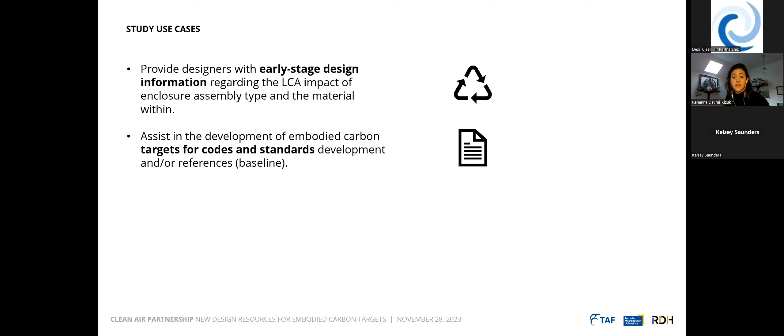Our next two points are for manufacturers. Our first bullet allows manufacturers to develop an understanding of the context of their projects or products - where their products fit within assemblies, which assemblies they're used in, and how the embodied carbon emissions of their products contribute to that whole assembly amount. Hopefully understanding where their product fits in the global context, they can use that as a way to innovate.

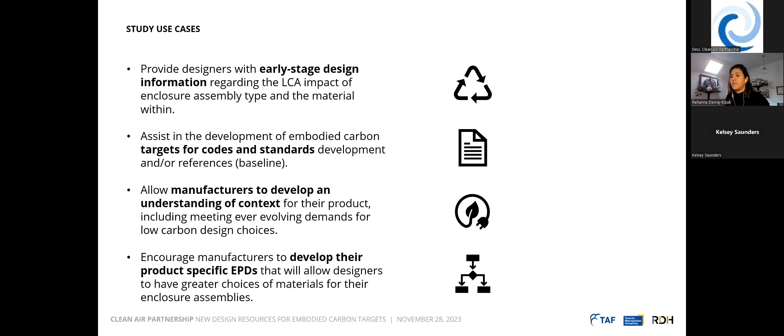And develop more options. Secondly, we want to encourage EPD generation. Availability of EPDs is a large limitation when conducting life cycle analyses. We think this tool will allow designers to focus their attention on materials that have lower embodied carbon potential, and have the highest environmental impact with their projects and seek out alternatives. The request for these alternatives can then incentivize manufacturers to develop EPDs for their own products and move the industry forward.

I'll jump into our methodology now. Something we like to say at RDH is that we have an enclosure first mentality, and this is where this study begins.

In operational carbon reduction, focusing on enclosure first means improving our thermal performance and airtightness to reduce the load carried by our building's mechanical systems. That same mentality is required in embodied carbon reductions. As we increase thermal performance, we're increasing the number of materials inside our walls - adding insulation, clips, fasteners and other materials that increase our embodied carbon performance in a whole building sense. So optimization is necessary to reduce our total life cycle carbon emissions.

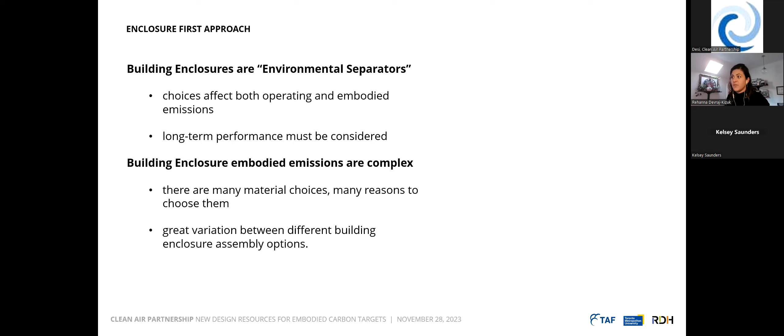Optimization can be complicated. We have many material options coming together in many combinations. There are so many different design goals and objectives that projects can have, so there's a high level of variation when considering enclosures, and this makes for a diverse selection of study options. That was one of the reasons why we focused on the building enclosure within this study.

There are two sections to our methodology: one is our assembly selection methodology, which I'm going to go through now, and the second is the methodology for conducting the life cycle assessment itself. We'll start with the assemblies, using that enclosure first mindset that I talked about. These are our three steps for assembly selection.

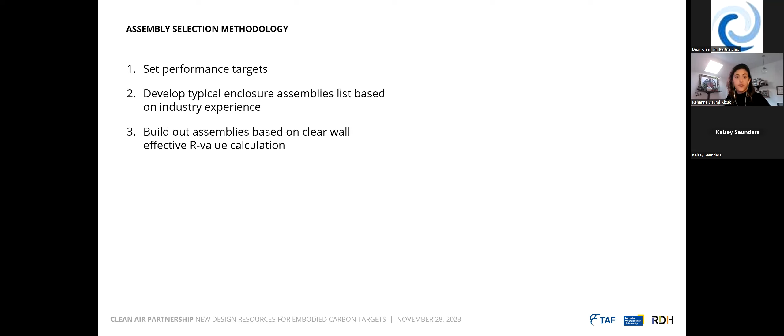First of all, in order to establish reasonable performance targets that meet the current needs of designers as well as future performance requirements of our local energy codes, we came up with these performance targets for our walls, roofs, and floors.

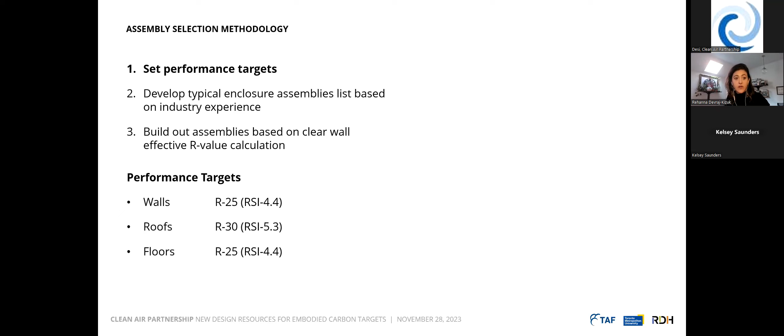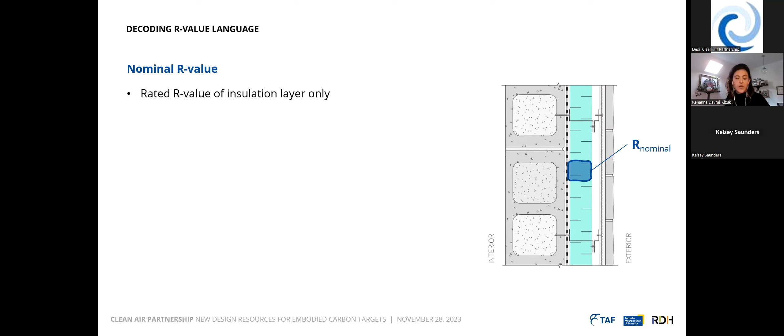I'll go into a bit more detail on what an R value is, just to make sure we're all on the same page. First, showing the assembly - what we're looking at there in blue is considered a nominal R value. That's the thermal performance of the insulation layer on its own, completely separated from the rest of the assembly. These are what you would find on a material cut sheet for an insulation property.

Our next level up from there is what we call an assembly R value, that's the orange box you can see on the screen. Now we're considering a slice of the assembly that includes the nominal R value of our insulation layer, plus the thermal resistance of our other layers, but taken in a linear slice. It doesn't necessarily include other unique elements around it, just the 1-dimensional performance of that layer.

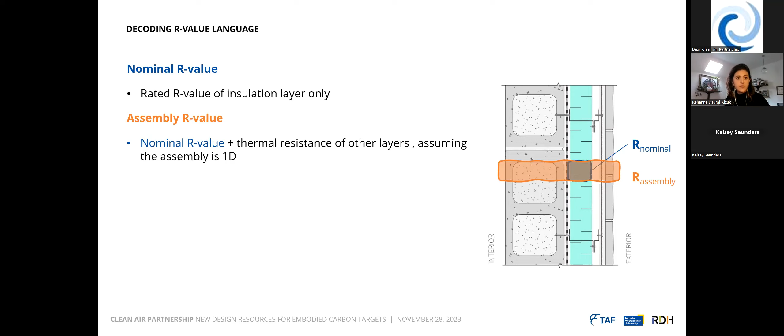What our study uses is an effective R value, or in this case, a clear wall R value. So now we're considering that assembly R value I talked about previously, but we're also considering the 2-dimensional effect of other repeat thermal bridges. What I mean in that case are clips or fasteners, metal products or studs, unique elements that aren't continuous throughout our system, but they do affect the overall thermal performance if you're considering a larger area.

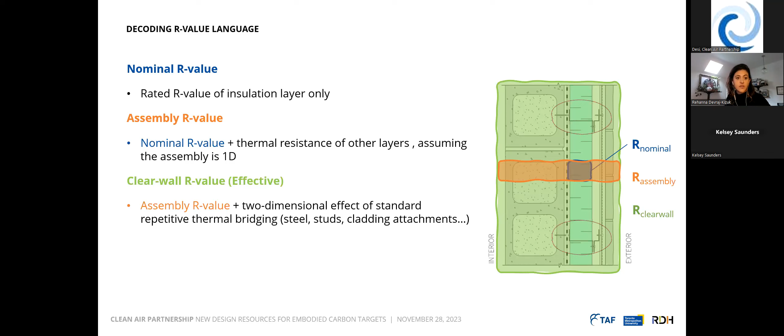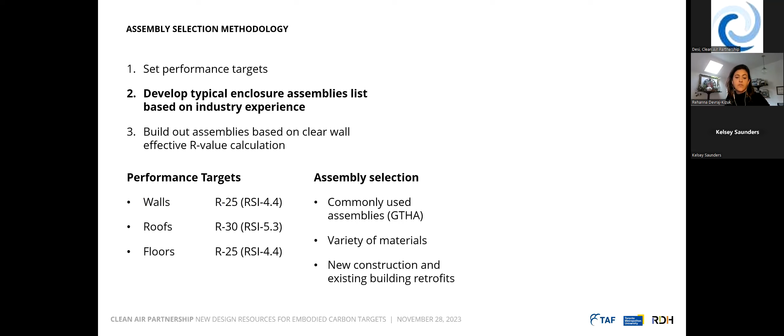Going back to our methodology: understanding our R value targets is where we started, and then secondly, we were able to select our assemblies. We focused on commonly used assemblies in the Greater Toronto and Hamilton region, and we prioritized having a variety of materials so we could see range across our study and diversity. We also made sure to include a few retrofit options.

The next layer in is the structure that holds up our building, so that would be columns, beams, rafters, joists. We don't consider those elements, but if there's a structural element like a concrete backup wall, you'll see in some of our assemblies we do consider that because it is continuous across our assembly. Anything internal to that is not considered.

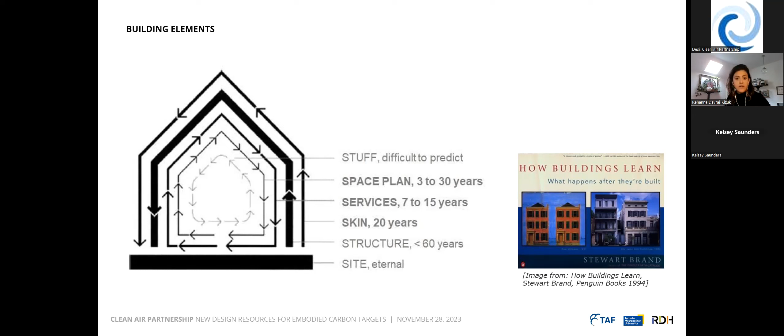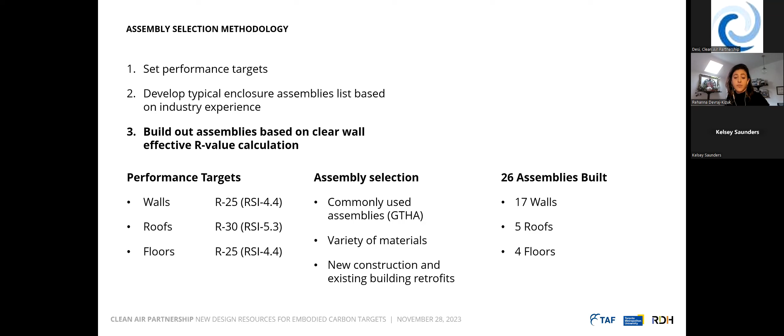With that information, we selected 26 different assemblies, including all the materials that comprise a typical installation of that assembly—our main control layers as well as repeating thermal bridges, so that's cladding, fasteners and attachments, insulation clips or metal studs, concrete backup walls, that sort of thing. But it doesn't include linear thermal bridges, so parapet transitions, transitions between subfloor and ground floor, or shelf angles, or major thermal bridges like that will not be included within the study.

Here are our wall assemblies. As you can see, we've got a diversity of options here: cladding elements such as brick, insulated metal and concrete panels, exterior insulation and finish systems. The retrofit assemblies on the right side of the screen, W14 to 17, show the white layers of the assembly are what we are assuming would remain in place if this building was already constructed.

For insulation, we have also a variety: mineral wool, XPS, phenolic, spray foam—plenty of options to get a good range, as well as our backup materials.

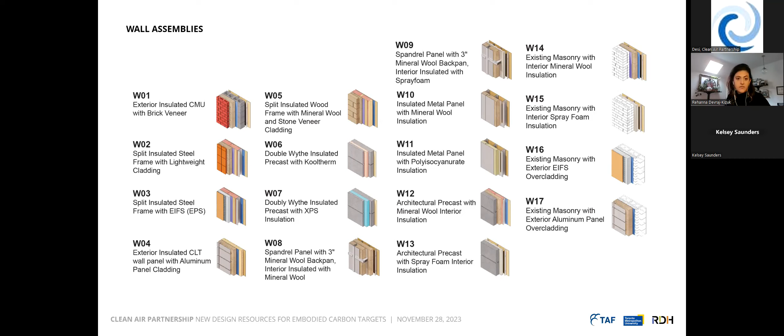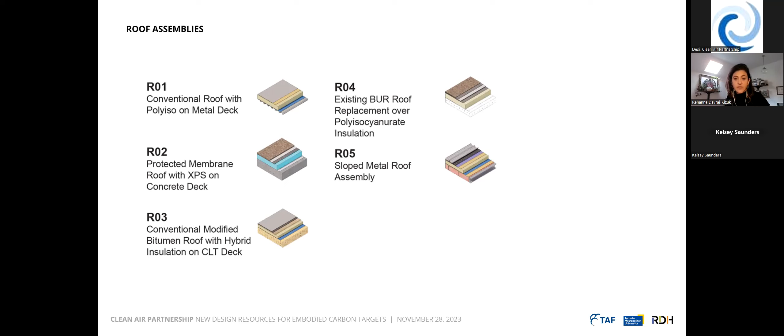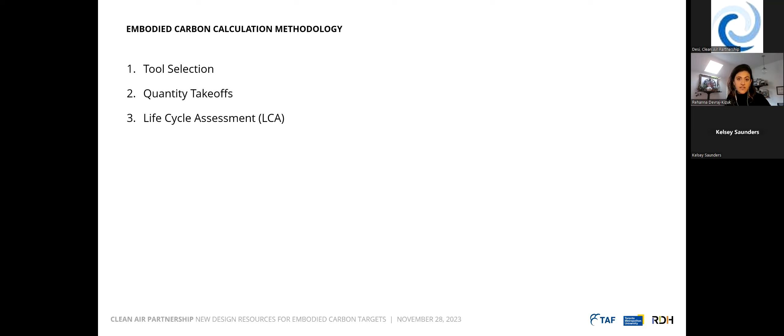Next is the life cycle assessment, or the calculation of our embodied carbon metrics, and we start off with our selection of tools. We used One-Click LCA for our study for a number of reasons: it's an online software with reporting alignment with over 40 different international certifications, many of which are commonly used in Ontario, and it has the ability to use specific environmental product declaration data as well as global averages, and I'll explain what that means in a second.

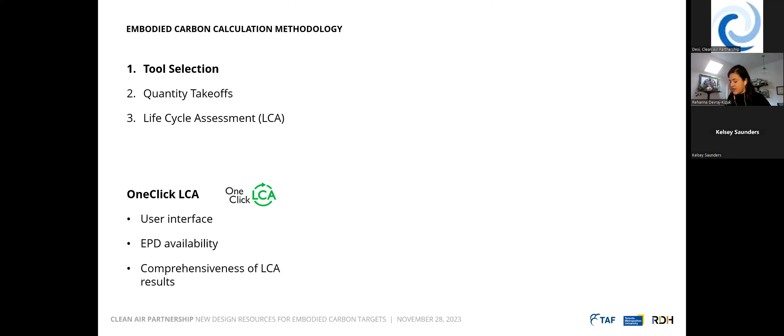Other advantages are it has a great user interface, and the data uploaded to it is updated within 24 hours of receiving any new information. So that makes it a useful option.

These different softwares can pull from two types of databases. The first is an EPD database, which is very product-specific information, usually produced by manufacturers for a specific material in a specific region. The second type is a generic database, where material data are based on industry averages. We tried to use industry averages for the study as much as possible, so it could represent our Greater Toronto and Hamilton area to our best ability.

And also represent the breadth of projects that you might see within this region.

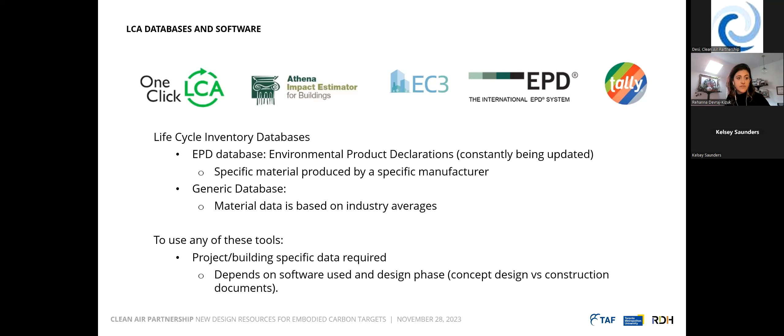So the next step in our LCA analysis is quantity takeoffs. In order to conduct a life cycle analysis, we need to have either volume or area takeoffs for all component parts within the assemblies. We calculated those as was appropriate for whatever environmental emissions data we were using for that material type.

And the functional unit that we used — the area of the chunk of wall assembly or roof assembly that we are including within our system — was 9 meters squared, and that's relatively large. We chose that size so that we could account for all of our assembly components that might be missed in a smaller area.

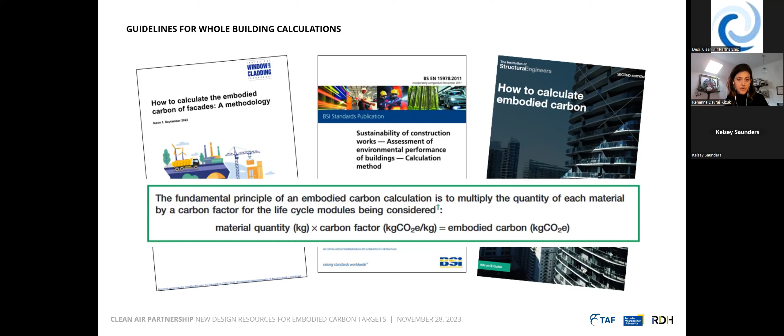This is just an understanding of LCA analyses. There are plenty of methodologies out there that present different ways to calculate embodied carbon emissions, depending on whether you have a single product, a system, a handful of systems, all the way up to a whole building analysis. But the fundamental principle of all of that is that we need the material quantity multiplied by a carbon factor, and that's what gets our embodied carbon emissions.

So for our study, we have a 9 by 9 meters squared functional unit, and here's an example of what you would see in our data sheet, where each of our material layers is described in detail, and the thicknesses and material volumes are calculated and shown there.

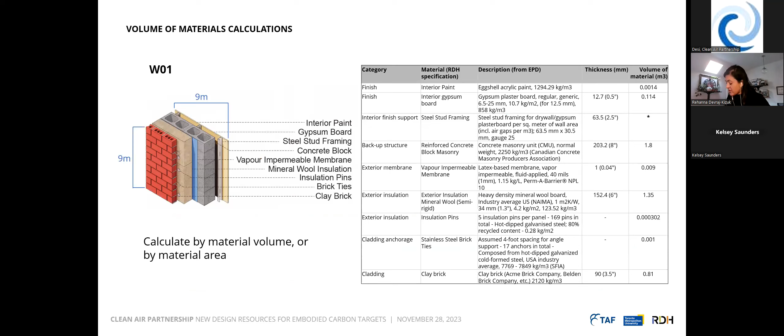The last step is to actually conduct our life cycle assessment. Our study focuses on stages A1 to A3, and I will explain what that is in a second. We used a 60-year lifespan for our project.

Our component EPDs were selected within the One Click database based on the most representative material that we could find available for that component's purpose and its material properties. And then the embodied carbon of the assemblies is presented in absolute values.

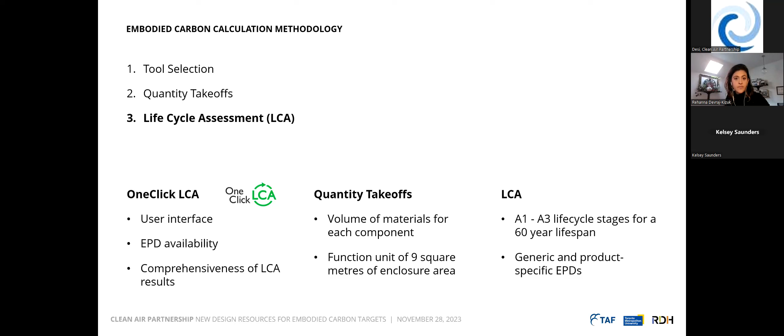A note on life cycle assessments: there are many different types, from a single material all the way up to a whole building. So a building or material or component's life cycle is summarized in stages, from its raw material extraction and product manufacturing through to its use, and then to the anticipated end of life — that's demolition and material waste processing.

So an LCA will provide an overall holistic overview of a project's environmental climate impacts. For our study, the output of the LCA that we were considering for embodied carbon emissions data falls under the global warming potential impact category.

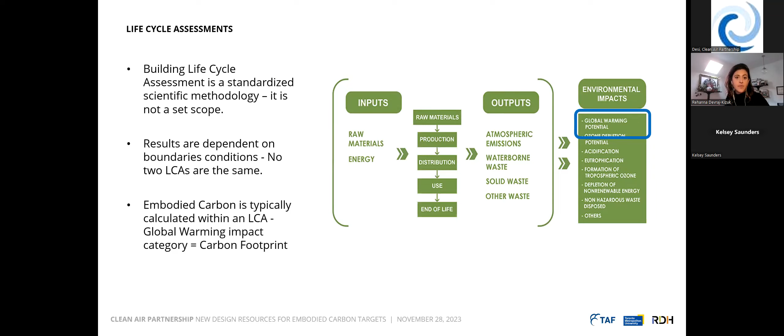Here is a look at the boundaries of our scope. In the brown dotted line, that shows kind of what a typical life cycle analysis could entail — product stage, construction stage, use, and end of life are all outputs that you can generate through a life cycle analysis. But for our study, we focused on the system you can see within the blue dotted line — just the product and construction stage. We would need far more details and assumptions to include use and end of life, so we're focusing on the embodied emissions of the materials themselves.

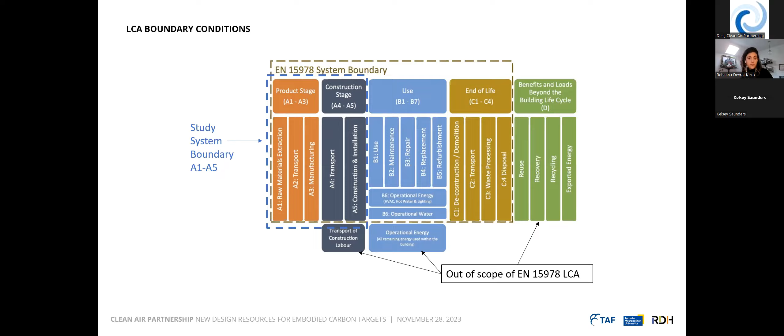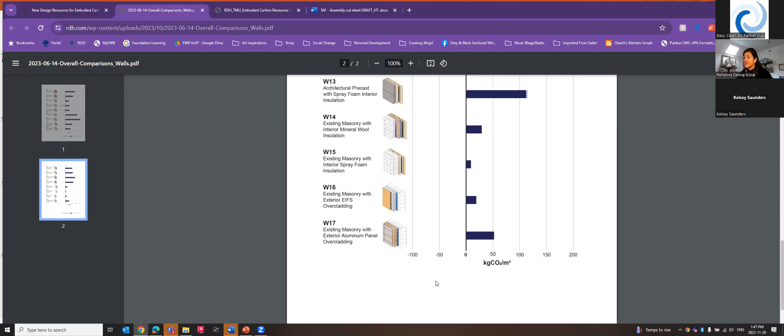All right, and I'll hand this back to Kelsey to wrap up our key takeaways.

Oh, Kelsey, are you here? Yes, I've been talking to myself apparently. Sorry about that, guys.

So all of the data sheets, we're in the process of updating them, which is why Rehanna was showing it the way that she was, but those will be live very soon, and you can download all of the cut sheets for each assembly right there on the website.

Okay, so now into key takeaways.

Some of the limitations and challenges of this study, of course, with any life cycle assessment, when we're dealing with EPDs, generic or project specific, it's challenging in the way that the data is gathered and the way the data is presented, and our confidence with the data.

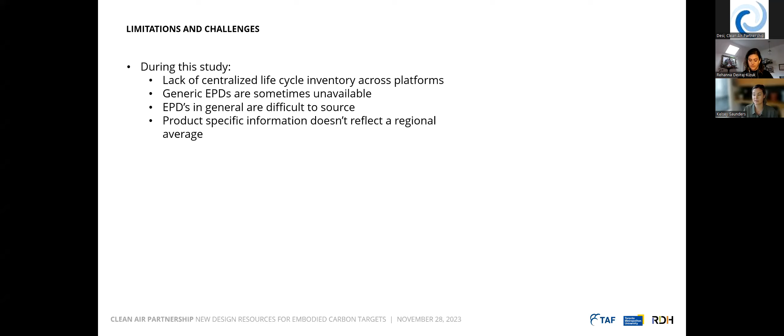During the study, there was a lack of a centralized lifecycle inventory across the various platforms of the tools that are available. The use of generic EPDs wasn't sometimes available to us for certain products, so we had to go and use product specific EPDs, which may not be representative depending on the type of product you're using. Product specific information obviously doesn't reflect a regional average.

This goes into applicability overall—not just things we found during the study, but issues we anticipate across the board on LCAs—that EPDs represent the energy that went into manufacturing, so this is very regionally specific. If you have a plant that's locally nearby and you think you'll use that product because it will have a lower impact on your emissions, the EPDs you're using may not be for that factory. It may be an average for all of the manufacturing that occurs across North America for that product. So it's very regionally specific.

The grid in Ontario is very clean, but this isn't the case everywhere. So if a product is manufactured elsewhere, it may actually have higher emissions because of its fuel source. The energy used in manufacturing, if it's electricity, is heavily dependent upon their grid.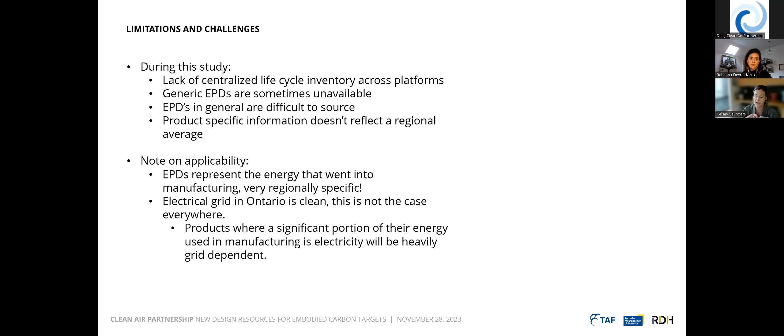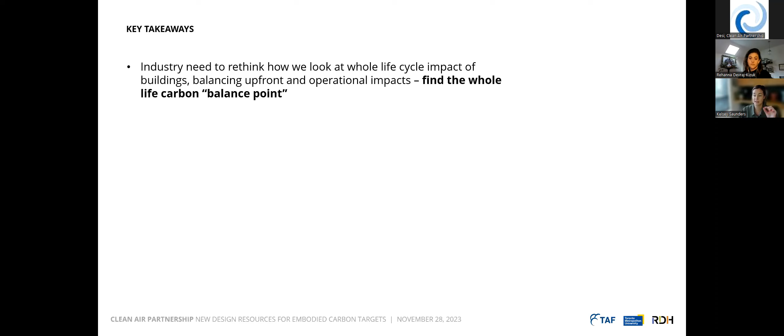Some of the key takeaways of the study and of this presentation: the industry needs to rethink how we look at whole life cycle carbon impacts in buildings, balancing upfront emissions and the life cycle operational impacts. That's finding the whole life carbon balance point. I think this is the key point to take away from this presentation.

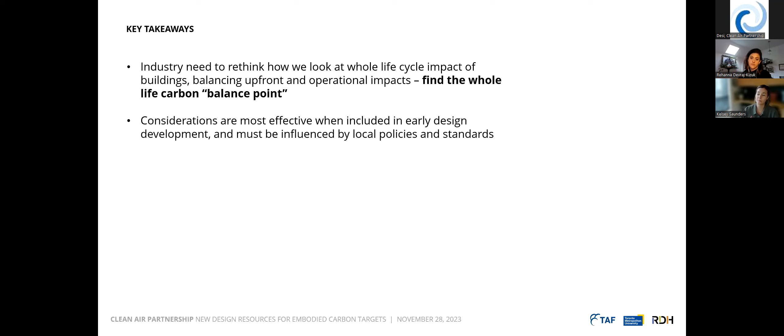Considerations are most effective when included early in design. And this must be influenced by local policies and standards that are pushing the need to achieve lower carbon emissions and higher levels of performance in this aspect.

Consider material durability and lifespan as part of this whole life cycle carbon review. This includes the durability impact of architectural details and mitigating future emissions for replacement and repair.

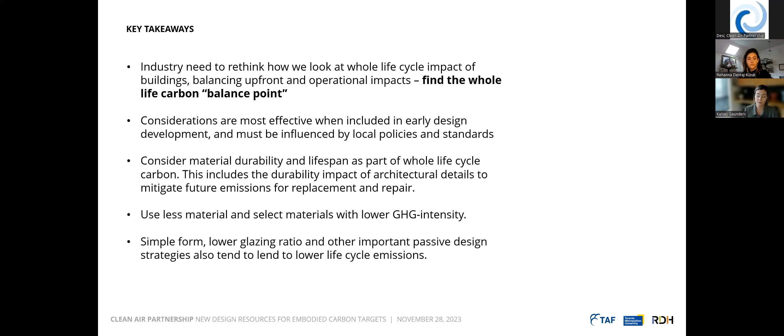Using less material and selecting materials with lower GHG emission intensity is obviously going to have a significant impact on this upfront carbon. A simple form, as we already talked about with passive design strategies, simplification of form, a lower glazing ratio, and other passive strategies also tend to lend to lower life cycle emissions, both in operation and in embodied emissions.

How do we envision this study being used? We want people to be able to reference the data in the study and adapt it to their own use case, which is why we think the takeoffs and volumes are really valuable. You can use the takeoffs and volumes and potentially use the global warming potential or the embodied carbon per square meter from EPDs, and just use the volumes we're referencing in the study if you're using a different product, for example.

And then inform the schematic level estimates of enclosure related embodied emissions early in design. If you're not familiar with this tool shown on the right, usually in schematic design there's at least some form of massing. So we can understand what we anticipate as a glazing ratio, and then the form of the building and the overall surface area of our walls, roofs, and floors. We can take that information, and right now it's put into this spreadsheet for thermal performance, to enhance thermal performance and understand the implications of thermal bridging.

This is from BC Hydro, Fortis BC PowerSmart, and it utilizes the building envelope thermal bridging guide to better understand overall building thermal performance, because we actually have targets for this, and these spreadsheets need to be submitted, at least in Toronto, for SPA. So if we already have these spreadsheets being filled out early in SD, why not add embodied carbon metrics to this as well?

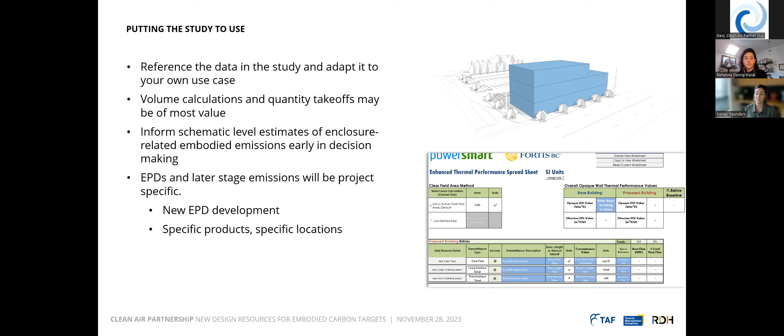So we intended that this would be one possible use case. EPDs and later stage emissions will be project specific. As much as our database is valuable, it also needs to be adapted for each project when new EPDs become available, and also for project specific EPDs in specific locations where your project is.

So please check out our new tool that Rahana showed and provide feedback. I don't know if we're talking to a designer audience or more to policymakers and municipalities, but is this tool useful to you? If not, what is your use case and how can the tool be adapted to suit?

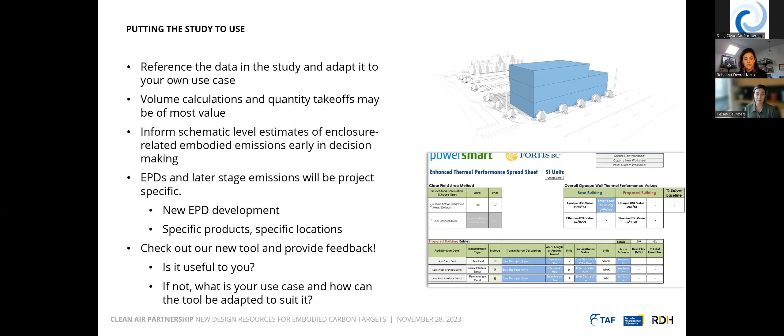We do plan to build off of this tool and off of this research to help make this more applicable across the board for our industry.

Some future work we've already considered is including common glazing assemblies. This is just something we could not get into in the scope of our study. More attention given to retrofits, as these are a critical component of the decarbonization of the built environment.

We'd like to do more of a sensitivity analysis, comparing options within each component type. We did a little bit of this on insulation cladding, but also backup structure and other elements within the enclosure design.

What is the impact of additional materials at transitions? What about window perimeters and at parapets, since there's additional materiality here? In that spreadsheet, we do have takeoffs for the lengths of these, so we can potentially add some metrics to that.

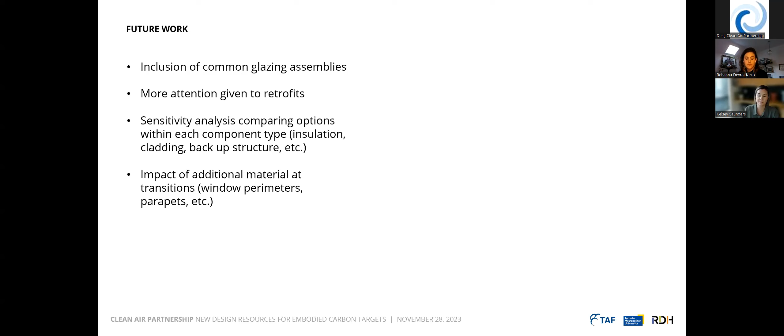Optimization of whole building carbon reductions for electrified buildings. As the thermal enclosure improves, so does embodied carbon, and we want to understand what that balance point is.